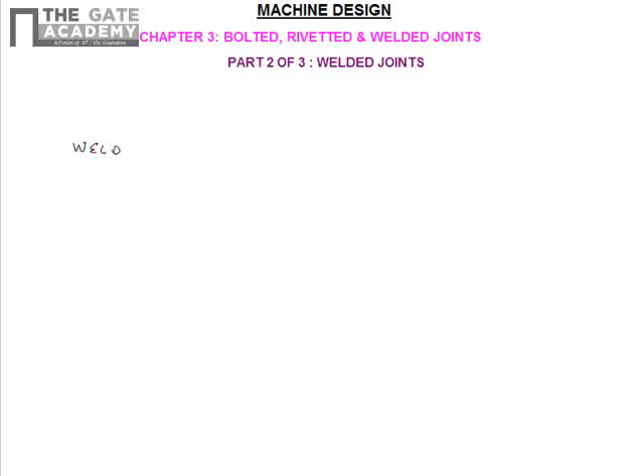Welded joints is an economical and efficient method of obtaining permanent joints. We've already seen that welded joints are permanent type of joints. Unlike bolted joints and riveted joints, this cannot be removed at any time during the assembly. It has to be caused damage to the assembly.

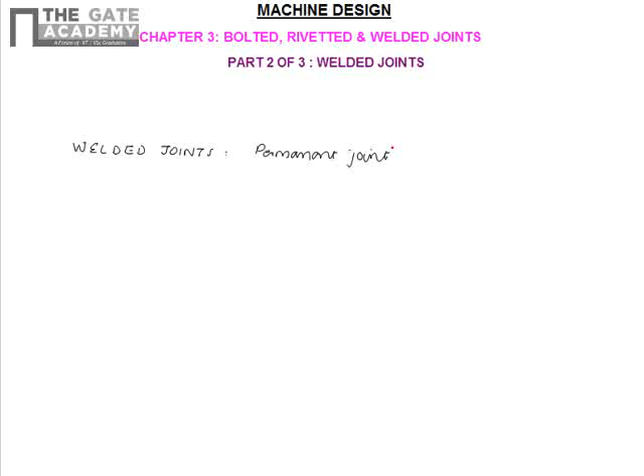Welding can be defined as a process of joining materials by heating to a suitable temperature with and without the application of pressure. Basically, there are three types of welding.

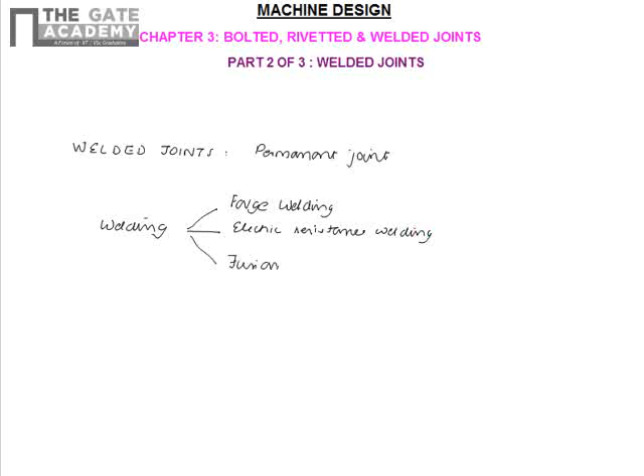Welding can be classified into three types. One is called forge welding. One is called electric resistance welding. The third one is called fusion welding. These are the main three types of welding.

In forge welding, the parts are heated to reach the plastic stage, and the joint is made by impact force.

In electric resistance welding, the parts are pressed together and the electric current is passed through them, so that because of the contact, the metal gets heated to the fusion temperature. That is about electric resistance welding.

In fusion welding, the edge of parts are heated by an oxyacetylene flame or an electric arc to reach the fusion temperature. Then they are joined using some filler materials. Again, fusion welding can be classified into gas welding, electric arc welding, and thermite welding.

The main two distinct applications of welded joints are they can be used as a substitute for riveted joints, and they can be used as an alternative for castings. Compared to riveted joints,

welded joints have got lot of advantages. They provide lot of advantages. Mainly, riveted joints require additional cover plates, gusset plates or straps, whereas in welding there is no extra additional part, and welding assembly always results in lightweight construction.

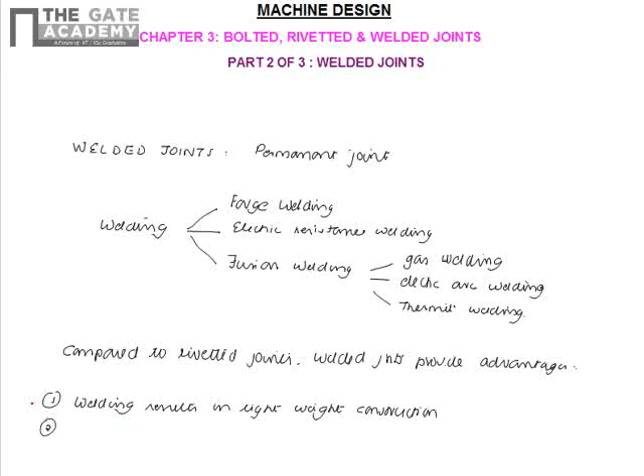Welding results in lightweight construction, in comparison with riveted joints. Then due to elimination of these components, the cost is also lower than riveted joints. Cost of welded joints is lesser than that in riveted joints.

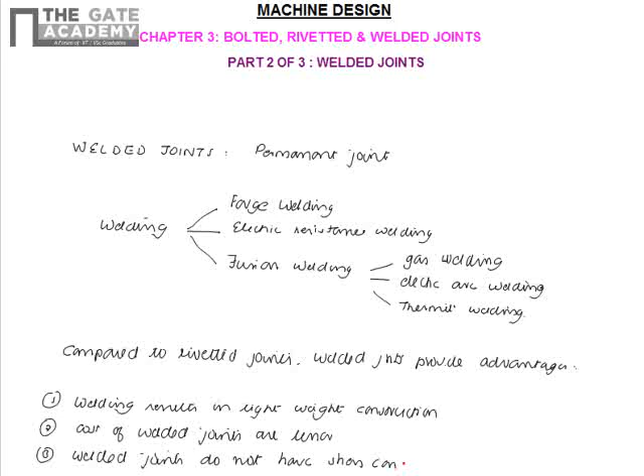Another thing is this: while using riveted joints, we have to make holes in the plates, which results in stress concentration as well as reduction in cross-sectional areas. This kind of problem does not come in welded joints. Welded joints do not have stress concentration, as in riveted joints.

Then, welded joints are usually tight and leak proof compared to riveted joints. Welded joints are tight and leak proof. These are some of the advantages of welded joints compared to riveted joints.

But they also have some limitations, like welding results in thermal distortions of the part. This is a major disadvantage of welding because it causes the fusion of materials, and it locally heats the material to a very high temperature, and when the material is cooled, residual stress gets inbuilt in the material, resulting in a lot of thermal distortions.

Therefore, welding will result in thermal distortions, thereby inducing residual stresses. This is a major disadvantage or drawback of welded joints.

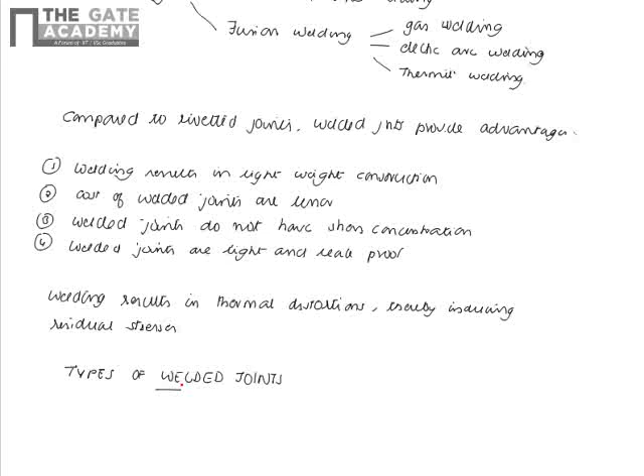Now, types of welded joints. Welded joints are basically classified according to the relative position of the two components. First, we have a butt joint, which is a joint between two components lying approximately in the same plane.

When thickness of plate is less than 6 mm, it is not necessary to bevel the edge of the plate, so square edge preparation is not required. It is something like this: when we have two plates which are parallel to each other, lying in the same plane, this kind of joint is called the butt joint.

This kind of preparation is called edge preparation. If the plate thickness is less than 6 mm, edge preparation is not required. If the plate thickness is greater than 6 mm, this kind of edge preparation may be required.

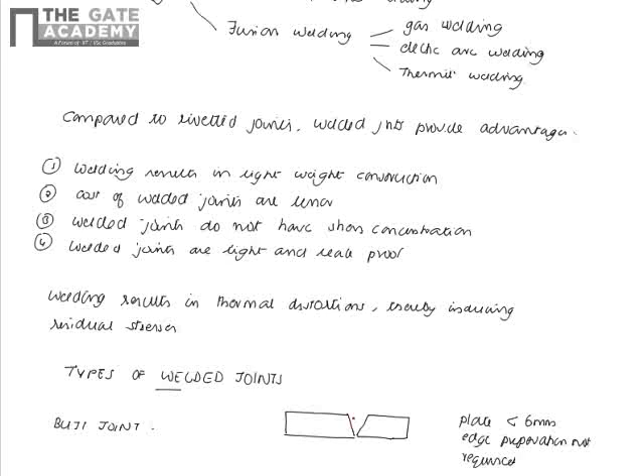And in this portion, we will fill the weld material, and this is called a butt joint. When there is no edge preparation done, such kind of joint is called a square butt joint.

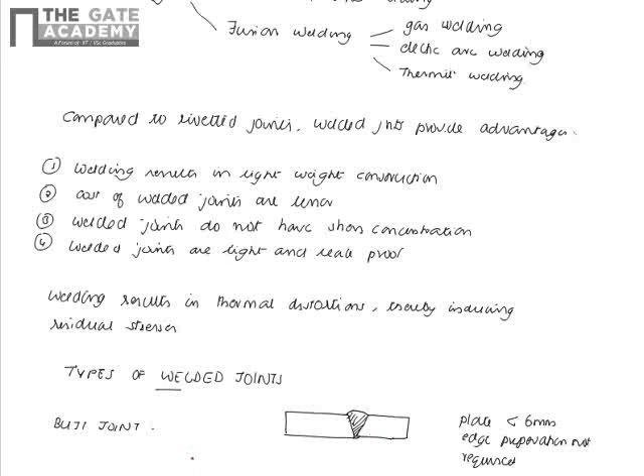So we can say that this kind of joint is called a square butt joint, which does not have any edge preparations. And when we have edge preparation, it's called a V butt joint. We have double welded V joints, and different types of butt joints are there.

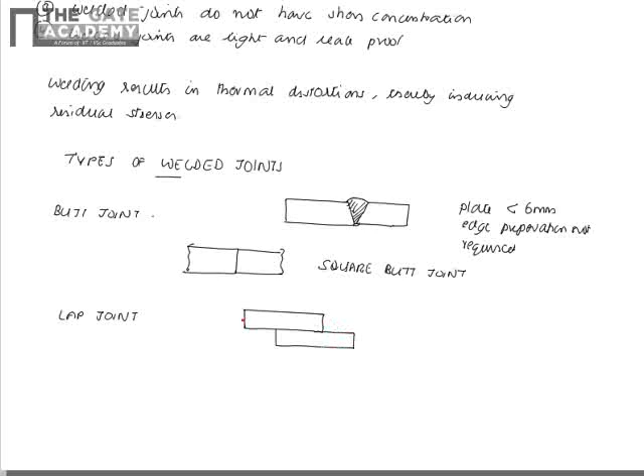Now, the next one is a lap joint. A lap joint is a joint between two overlapping components, and it consists of a fillet weld. So, a lap joint can be shown as this: two plates, and it is welded like this.

This is the lap joint, and this kind of joint is called a lap joint. This kind of welding is called a fillet weld. The fillet weld consists of an approximately triangular cross section joining two surfaces at right angles to each other. We can see here these two surfaces are at right angles to each other, and they are joined by a triangular kind of weld.

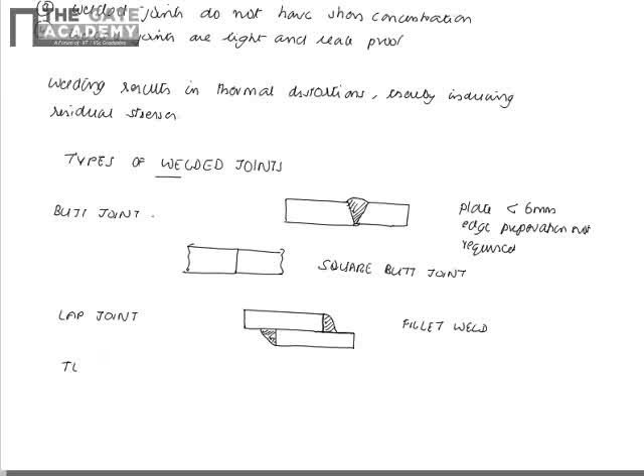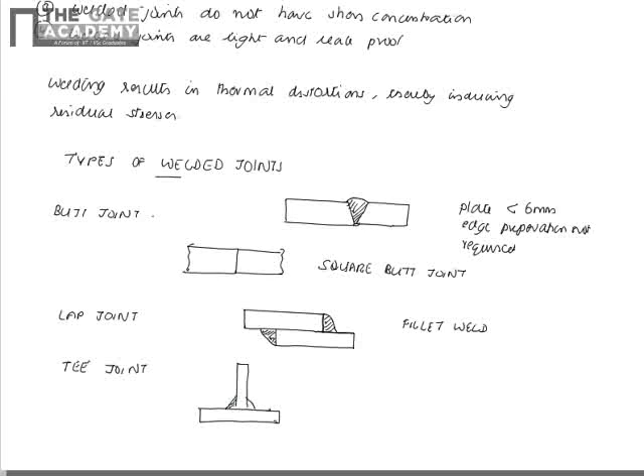Now we have something called a T-joint. It's nothing but a joint between two components located at right angles to each other. Here the two components which are welded are placed at right angles to each other in the form of a T. The end face of this component is welded to this component by means of a fillet weld.

This kind of weld is called butt welding, where two plates are in parallel position, and you have square butt joint, V butt joint, U butt joint. Different types of butt joints are also available. And when we come to lap joint, this kind of weld which has a triangular cross section is called a fillet weld. Even in T-joints also we come across a fillet weld. So these are the different types of welded joints available, and welds are classified based on the type of joint. Now we will try to see what are the stresses coming in the butt and fillet welds.

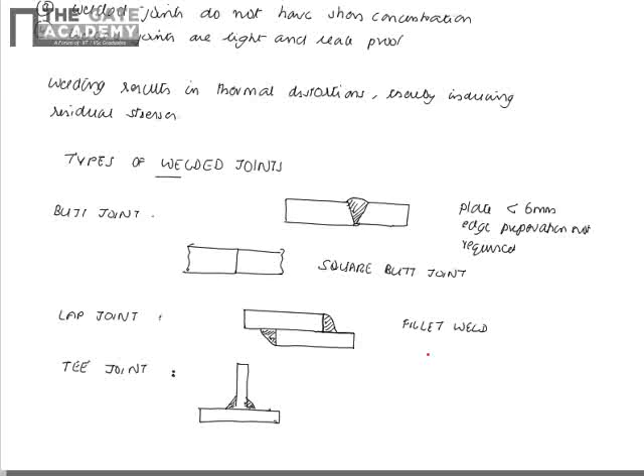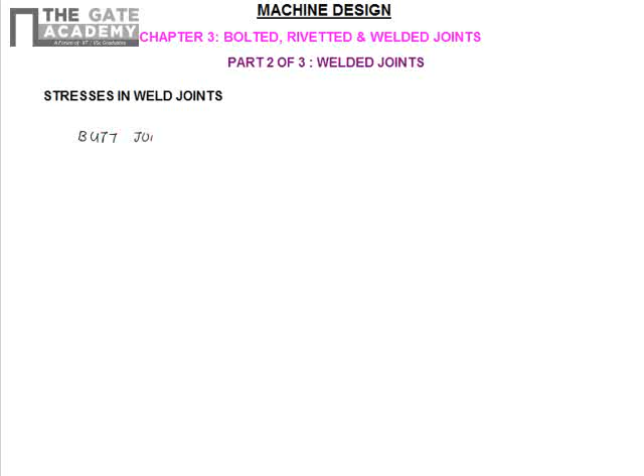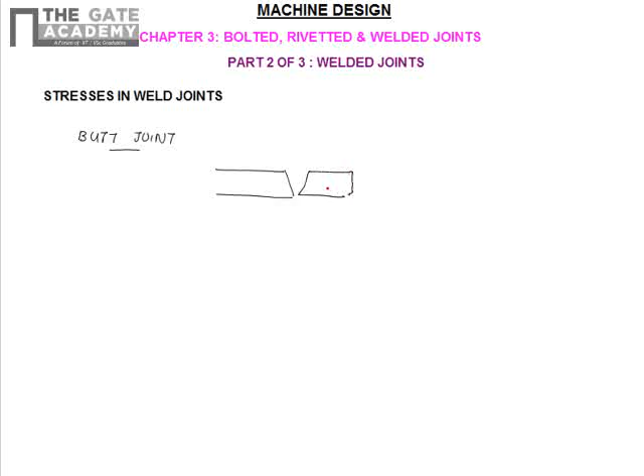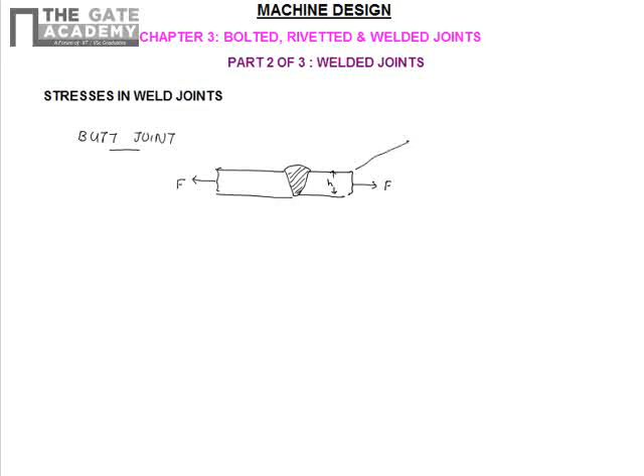Now we will see the different types of stresses in the weld joint. Basically we will start with a butt weld joint. So two plates are joined in this way. This is called a V butt joint. This is a weld, and we have a force F applied on both ends. Here the thickness of the plate is H, and the length of the plate...

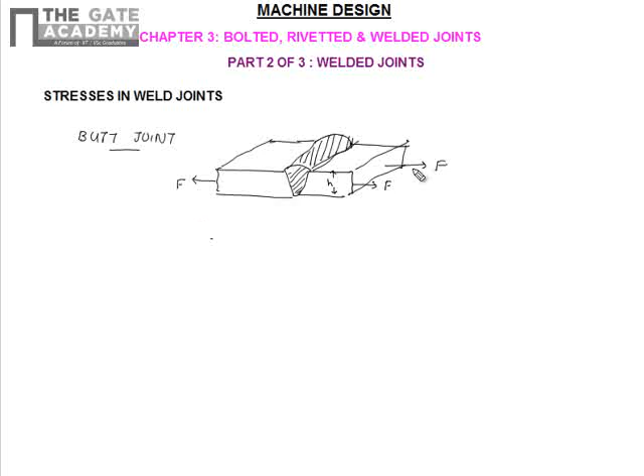So this kind of plate, two plates side by side, is joined by a butt joint, a V butt weld, and a force F is applied which tries to separate both plates. In this case, we have a normal stress in the weld joint, and the normal stress coming in the weld joint is given by F by area, where area is H into L, H being the thickness of the plate, L the length of the plate, and F the force applied. Sigma is the average tensile stress in the weld.

The throat of the weld does not include the reinforcement. The extra portion of material we see above this portion is called the reinforcement. H does not include the reinforcement. Whenever we go for fatigue loading or variable loading, this reinforcement has to be removed, because it causes a kind of discontinuity at this edge, which results in higher stress concentration under fatigue loading. So whenever we go for variable or fatigue loading, reinforcement is not preferred. This is the normal stress which comes in the butt joint.

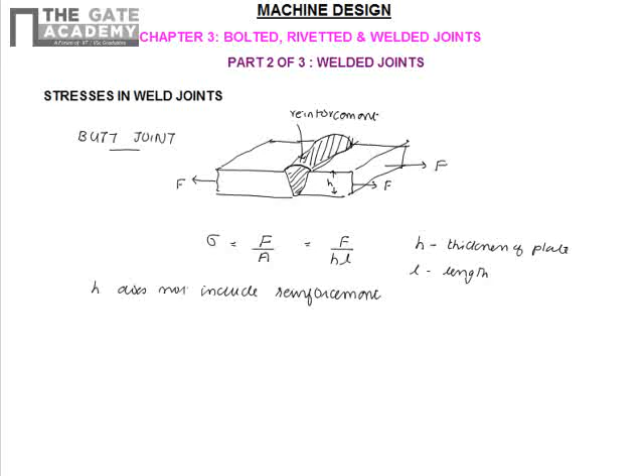Now we will see the second type of joint, namely the fillet weld joint. In a fillet weld, we have two plates kept on top of each other and welded in this way. We have already seen this kind of joint is called a lap joint, and this kind of welding is called a fillet weld. These two plates are tried to be separated by a force P.

Now in this case, if H is the thickness of the plate, the shear stress tau is given by P by the minimum area of the weld. The minimum area of the weld, if this is the triangular portion of the weld, the minimum length would be the perpendicular distance, and this will be, if this is H, this length will be H by root 2. This is called the throat of the weld. The throat is the portion which has the minimum area in the weld.

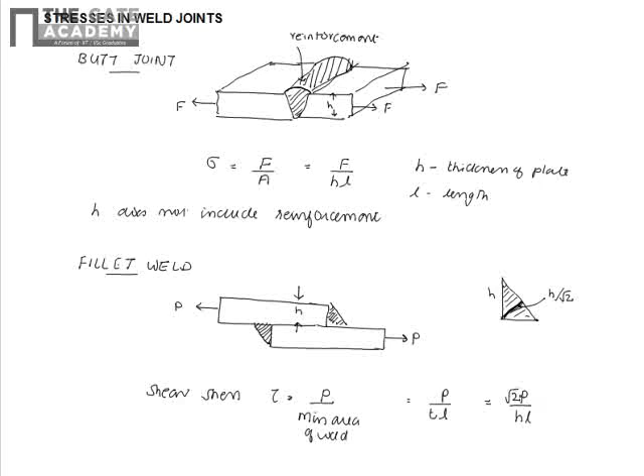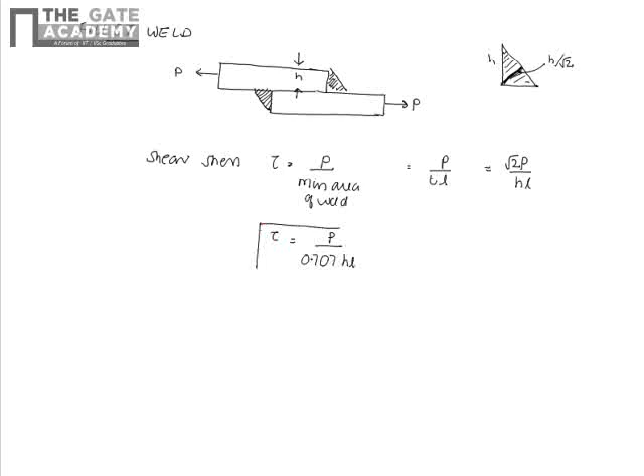So it will be P by T into L, which is equal to P by H by root 2 into L. It will be root 2 P by HL, or this will become P by 0.707 H into L. This will be the shear stress coming in the fillet weld joint.

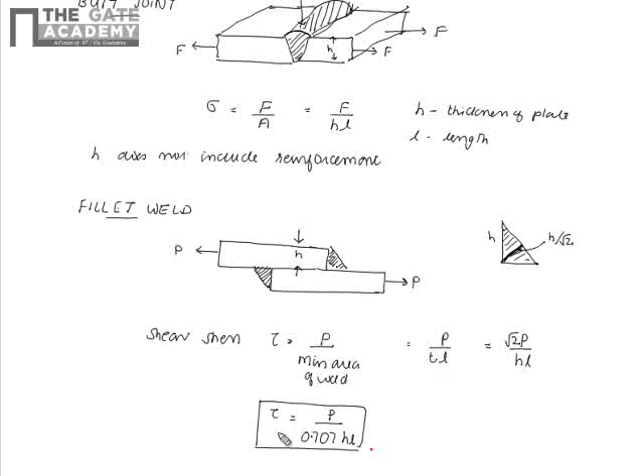In butt welding we have the normal stress given by F by H into L, where H is the width or thickness of the plate. Remember, H is the thickness of the plate and T is the throat of the weld. In fillet weld we have tau equal to P by 0.707 H into L, where H is the thickness of the plate, or it can also be written as P by T into L, where T is the throat of the weld.

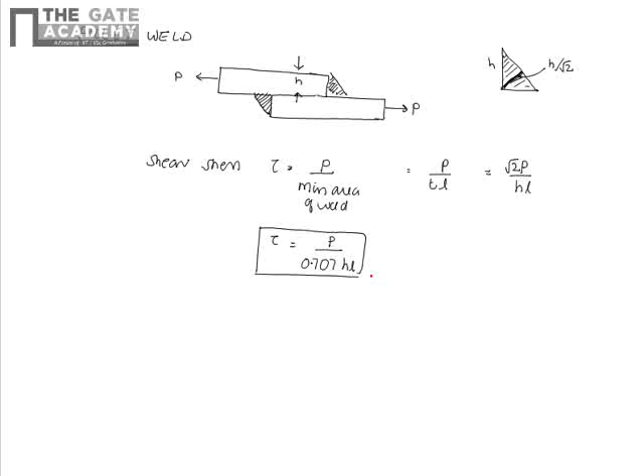Now we will see the case of a cantilever beam supported and fixed to the wall by two weld joints, with force F applied at the free end at length L. So now we will see the weld joints in torsion. This figure shows a cantilever of length L welded to a column by two fillet welds. The reaction at the support of the cantilever always consists of shear force and a moment. Now this is a force F applied at the free end. How do we find the amount of shear stress coming in the weld?

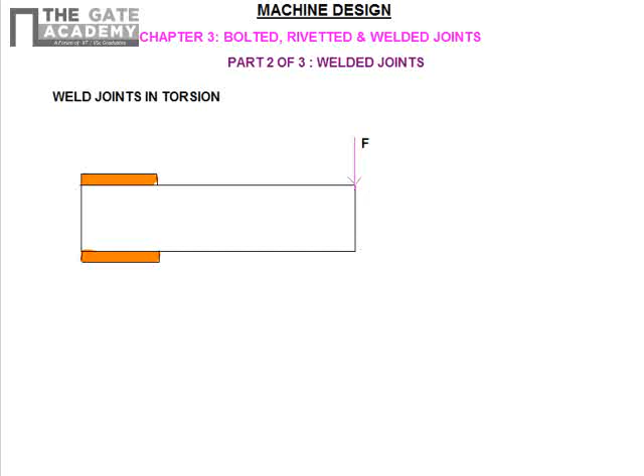To start with, as we have done in bolted joints, this force is transferred to the centroid of the weld joint. Since it's a symmetric weld joint, the two fillet welds at both ends will have a centroid at the center, and this force is transferred to the center. So it will have a force F, and it will have a moment given by F into E, where E is the distance of this force from the centroid. Similar to a bolted joint design, here also we will have a primary shear and a secondary shear.

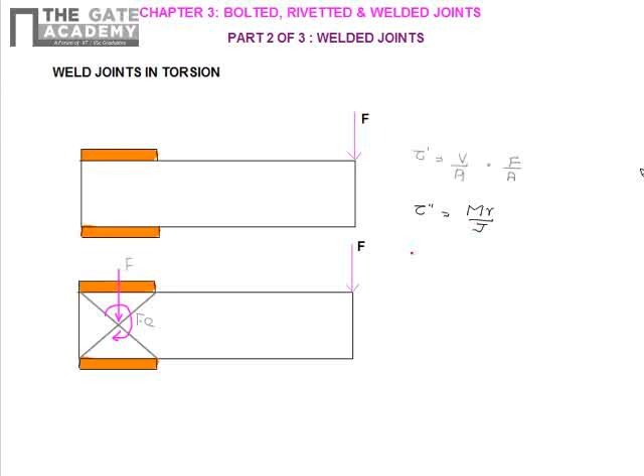The primary shear force or primary shear stress is given by tau dash equal to V by A, where V is nothing but the force F. The effect of the force on the weld joint will be seen in the primary shear stress, tau dash. Now the moment at the support causes secondary shear or torsion of the weld, and this stress is given by tau double dash equal to My by J, or Mr by J. So it is Tr by J, where R is the distance from centroid of weld to the point of interest.

Unlike bolted joints, where we had to find the stresses in the bolts, here since it's a weld joint, you can find the stress anywhere in the weld joint. We try to find these stresses at the points which are at a maximum distance from the centroid, since that will have the maximum stress. So this corner point will be the point of interest for us. At this point, if the distance is R, the secondary shear stress tau double dash is given by Mr by J, where M is equal to F into E, R is the distance from the center, and J is the polar moment of inertia of the weld joints.

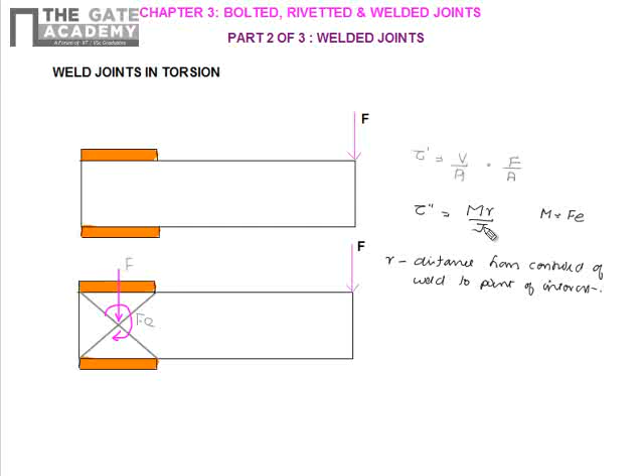Now suppose these weld joints can be represented like this. If this weld joint represents the throat widths, namely B1 and B2, the total area of the weld will be A equal to area of weld 1 plus area of weld 2, that is B1 D1 plus B2 D2. This is the area which has to be used in the formulation of primary shear stress, tau dash equal to V by A. Here the area to be used will be nothing but B1 D1 plus B2 D2.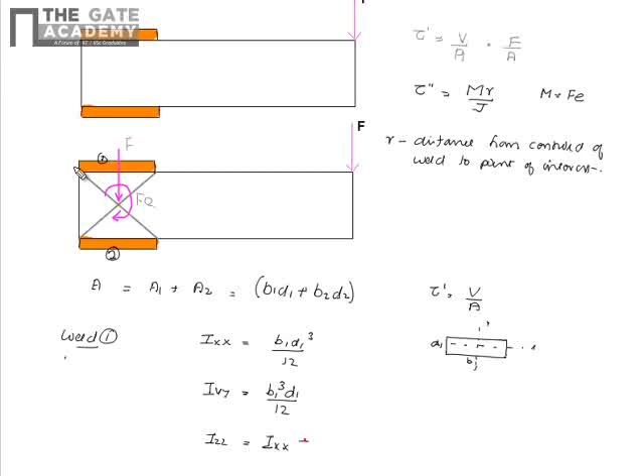Now we have found the centroid location. What is the moment of inertia of the weld about the center point? We will find, suppose this is weld 1 and this is weld number 2, we'll take weld 1. The moment of inertia about its own axis is given by B1 D1 cube by 12, where this is the weld, this is B1, this is D1. If you draw a centroidal axis for that weld, this is the x axis and this is the y axis. The moment of inertia about the centroidal axis for this weld is given by B1 D1 cube by 12. Similarly, Iyy will be given by B1 cube D1 by 12. Therefore, the polar moment of inertia, Izz, will be given as the sum of Ixx plus Iyy. This is nothing but B1 D1 cube plus D1 B1 cube by 12. Now this can be written as A into B1 square plus D1 square by 12. This is the moment of inertia of the first weld about its own centroidal axis.

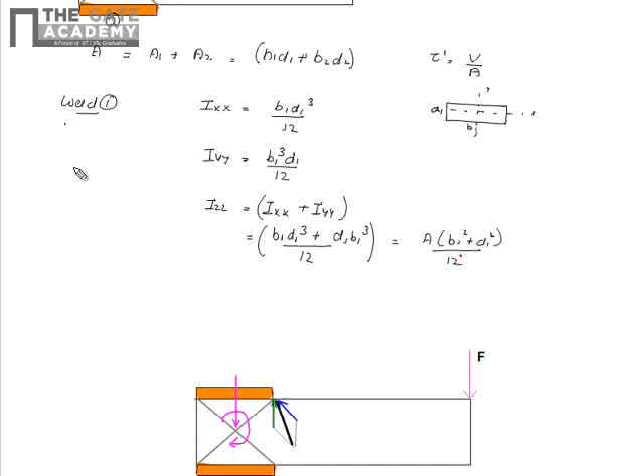Now what will be the moment of inertia of this weld about the centroid of the weld joints? In this figure we can see the force and moment acting at the centroid, causing a primary shear and a secondary shear at the weld joints, which has a resultant. Now we have found the polar moment of inertia of weld 1 about its centroid. So the polar moment of inertia about the centroidal axis IC will be equal to IZZ plus A into H square, where H is the distance between the centroids.

So the distance we can take, suppose this is the plate, this distance we take as R0 - the distance between the centroids, that is this point and this point. We have ICC equal to A into B1 square plus D1 square by 12, plus A into R0 square.

In this expression we know B1 and D1 - this is B1, this is D1. Since B1 is much greater than D1, B1 square will be much greater than D1 square, so D1 square can be neglected from this equation. We get A into B square plus R0 square, that is B square by 12 plus R0 square.

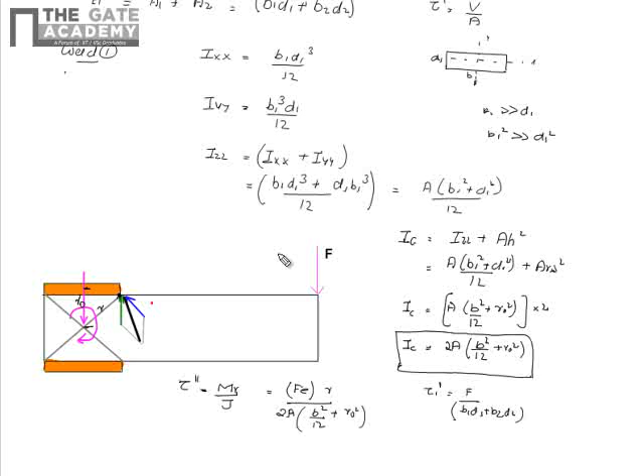Now we will see how to apply this principle in a problem. Here a welded connection shown in the figure is subjected to an eccentric force of 7.5 kilonewtons. Determine the size of the weld.

Size of the weld if the permissible shear stress of the weld is tau allowable equal to 100 Newton per mm square. This is the maximum shear stress which is allowed in the weld. So what will be the size of the weld?

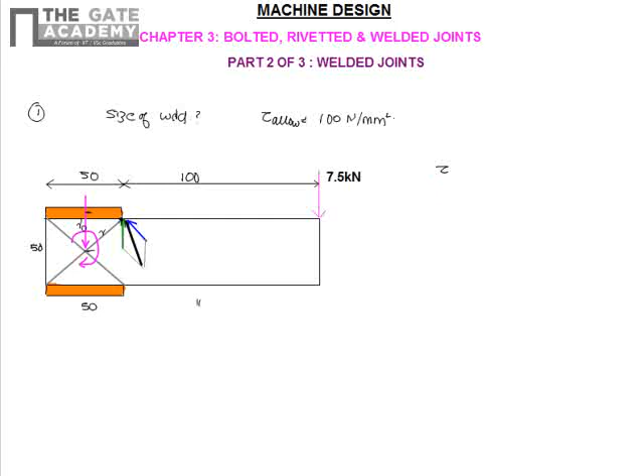Before starting we have to find the primary shear stress, given by V by A. For that we need the area of the weld. Area of the weld will be given by 50 into T into 2, that's equal to 100T, where T is the throat of the weld.

The centroid location, because of symmetry, will be at the center point only. Therefore E, which is the distance of the force from the centroid, will be 100 plus 25, equal to 125.

Therefore the moment will be equal to F into E. This is equal to 7.5 kilonewtons, that is 7500 into 125. 7500 into 125 will be equal to 937,000 Newton millimeter. This is M.

And what is V here? V is nothing but 7500 newtons. So what is the primary shear stress? Primary shear stress tau dash is given by V by A, that's equal to 7500 divided by A. A is nothing but 100T. So this will be 75 by T.

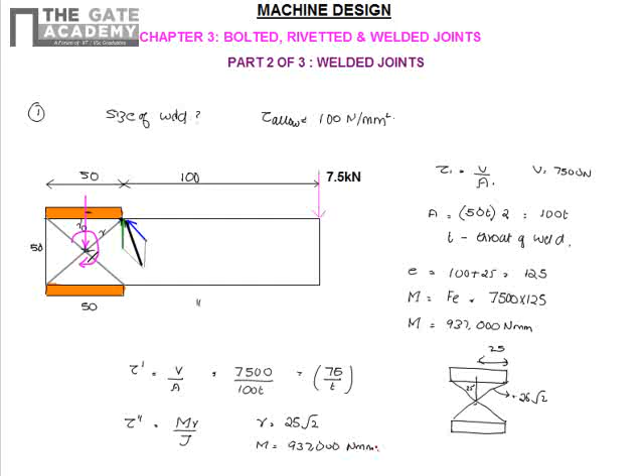Now the only thing we have to do is find what is J. J we have already seen - J is equal to A into B square by 12 plus R square.

That is, if we have two welds, weld 1 and weld 2, the moment of inertia Ixx will be given as, if thickness is T and width is B, Bt cube by 12 plus Tb cube by 12 will be Izz of weld 1 about its own centroid, which we can assume to be Tb cube by 12.

Therefore I about the centroid will be equal to Tb cube by 12 plus A into H square, that's equal to A into B square by 12 plus R square. The H is nothing but the distance between the centroids, which will be equal to 25 mm.

So the ICC, the polar moment of inertia of both welds about the centroid location, will be 2A into B square by 12 plus R square. That's equal to 2 into A, where A of the weld is 100T. B is the width of the weld, that is this length, equal to 50 mm. So 50 square by 12 plus R, the distance of this centroid from the center, is 25, plus 25 square.

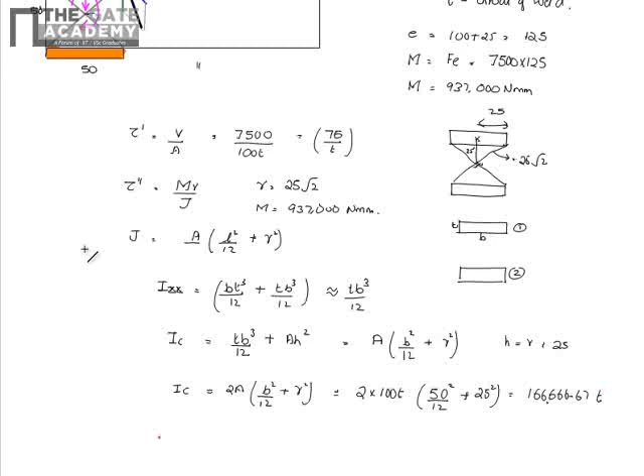So the secondary shear stress tau double dash is equal to Mr by J, that's equal to 937,000 into 25 root 2 divided by J, which will be equal to...

In this area of the weld, the 100T is the area of both welds, therefore the multiplication of 2 is not required because it's already taken care of. So this will be 166,667 by 2, it will be 83,333.35.

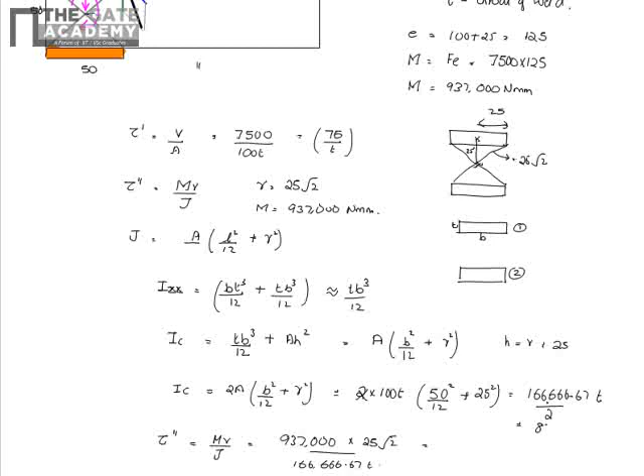This by 2, so this will be 937,000 into 25 into square root 2, divided by 166,666.67 by 2. This will be equal to 397.8 by T, Newton per mm square.

So this is the secondary shear stress, and the primary shear stress is nothing but V by A. This is 75 by T, which we have already found out.

Now what will be the resultant shear stress? Here is my weld 1. At this point, the primary shear stress is given by 75 by T, and the secondary shear stress is given by 397.8 by T. So in this case, what will be the resultant shear stress?

We know that the angle between the welds is equal to 45 degrees. Therefore, the resultant can be found as the root of tau 1 dash square plus tau double dash square plus 2 tau double dash cos 45. This is nothing but 1 by T, the square root of 75 square plus 397.8 square, plus 2 into 75 into 397.8 into cos 45. This will come out to be 454 by T.

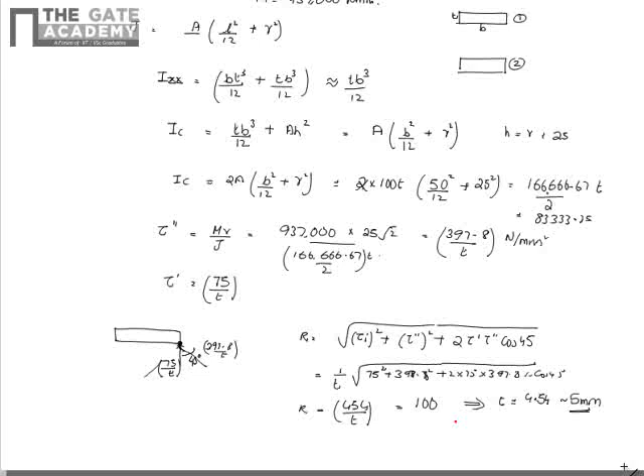So in the earlier portions we have seen the weld joint subject to torsion. Now we will see what happens to a weld joint subjected to bending moment, and what kind of stresses come in those kind of weld joints.

The case is shown here: a cantilever beam of rectangular cross section is welded to a support by means of fillet welds 1 and 2. What kind of stresses come in this weld, and how do we do the design of this weld? We know that this force F acting at this point can be shifted to the centroid of the weld joints by an additional moment also coming in. So when the force is shifted from this point to the centroid, it gets shifted along with a moment given by the force into the distance between the two axes, which is Fe.

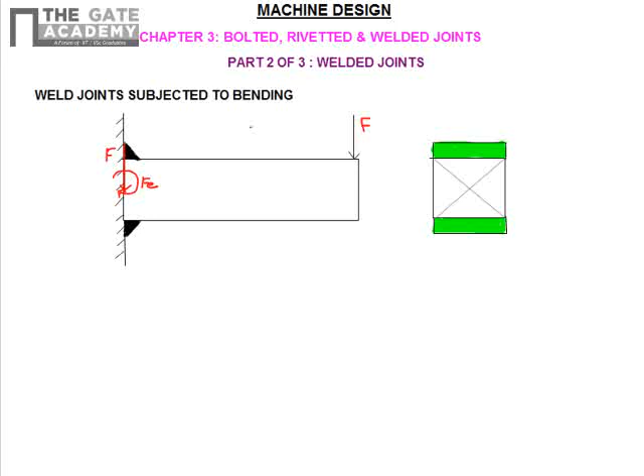Now from this diagram, the effect of this force F will be to produce shear in the weld joints, and the effect of this moment or couple Fe will be to produce a normal stress on the weld joints. So here we are going to get a combination of shear stress and normal stress. We'll see the values of the stresses we get in this kind of case.

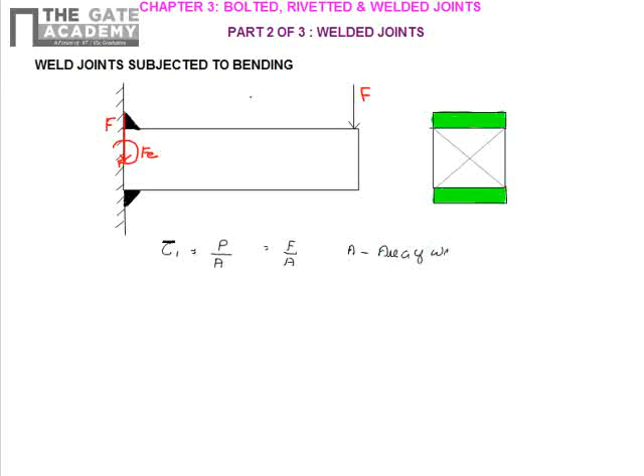So here we can say the shear stress tau 1 will be given by F by A, where A is the area of the weld. In this case it will be B1 D1 plus B2 D2, the complete area of the weld, where B1 is this length and D1 is this length. This will be the shear stress in the weld joint.

And what about the normal stress? Normal stress will be the bending moment into Y by I.

Now what is I? I is the moment of inertia of all the welds about the neutral axis, and Y is a distance from the neutral axis. So here in this case, the neutral axis will be the axis passing through this point.

So that is nothing but Ixx. So Ixx of the weld about its own centroid is given by BT cube by 12. The moment of inertia, Ixx, BT cube by 12, that will be the moment of inertia about the centroid of this weld.

Now we want to transfer this moment of inertia about this axis. Therefore, moment of inertia about the centroid will be equal to Ixx plus A into h square, by parallel axis theorem. This is equal to BT cube by 12 plus area of the weld, BT, into the distance. We will assume the total length to be D, so it will be D by 2 whole square.

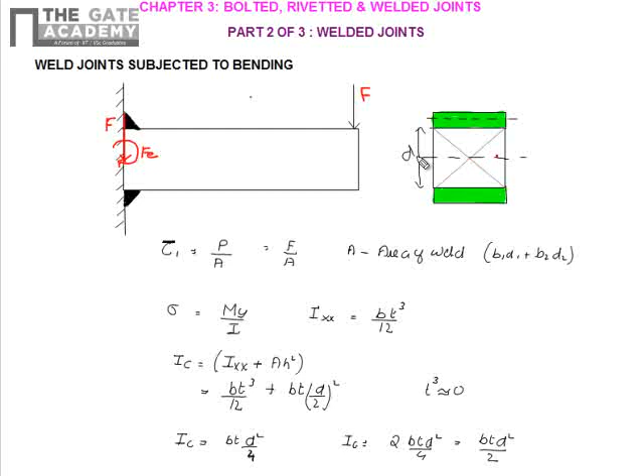Now we have the values. We have sigma equal to My by I. What is y? Y is nothing but d by 2, and I is bt d square by 2.

Now we know what is sigma and what is tau. Therefore, the maximum shear stress will be equal to square root of sigma by 2 whole square plus tau square. This is the maximum shear stress. When we have a combination of normal stress and shear stress, it will be given by square root of sigma by 2 whole square plus tau square.

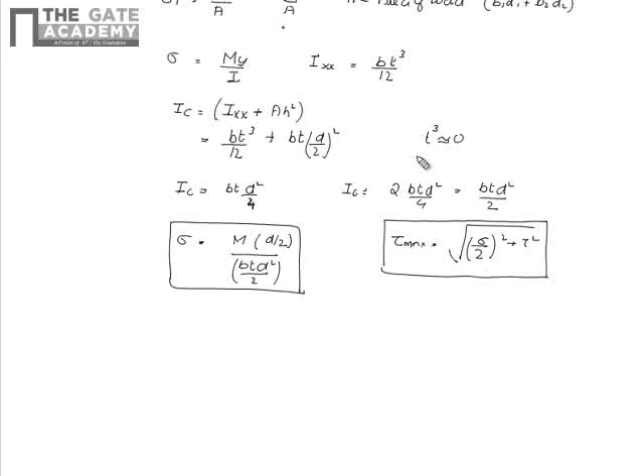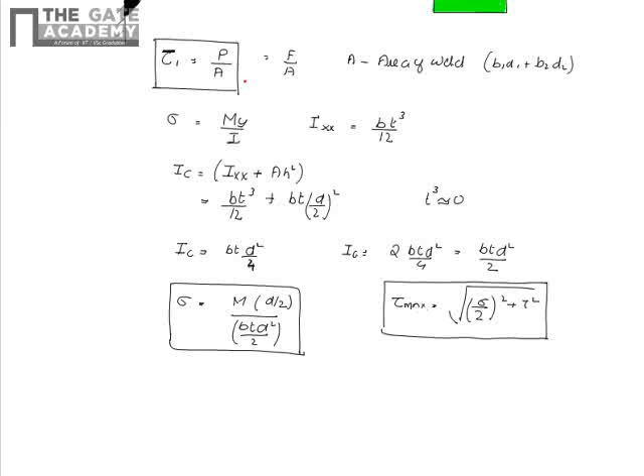Now sigma is given by this relation, and tau will be given by this relation, P by A. So we know tau, we know sigma, so we can find the maximum shear stress in this kind of weld joint. Thus we can design weld joints when subject to bending also.

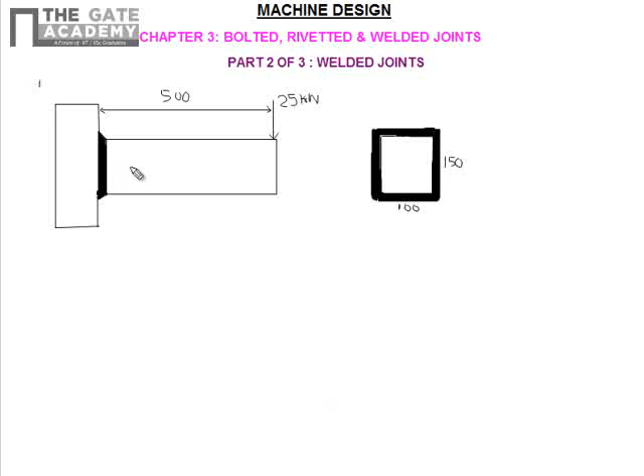Now we will take another problem. We have a shaft of rectangular cross section which is welded to a support by means of fillet weld as shown here. Determine the size of the weld if the permissible shear stress, tau allowable, is limited to 75 Newton per mm square.

Now how do we start with this? We have to find the total area of the weld. Total area of the weld will be given by 150t plus 100t into 2. This is equal to 500t mm square, where t is the throat of the weld.

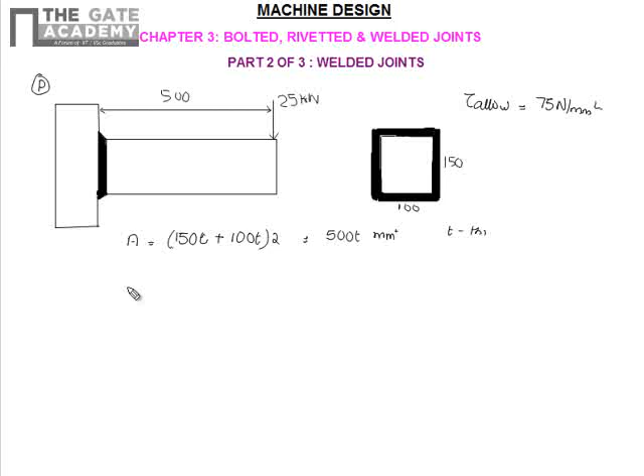Now the primary shear stress tau 1 is equal to P by A, that's equal to 25 kilonewtons divided by 500T. This will be equal to 50 by T Newton per mm square.

Now the secondary stress - we know the bending stress is given by My by I. M is equal to 25 into length, which is 500 mm, so this much Newton mm. And y is equal to the height by 2, 150 by 2.

And what is I? I is the moment of inertia of the complete weld about the centroidal axis, which is this axis. Now if we consider this as weld joint 1, this is 2, this is 3, and this is 4.

Now for weld 1 as well as weld 3, the moment of inertia about its own axis is given by BT cube by 12, and the moment of inertia about the centroidal axis is given by BT cube by 12 plus BT into d square. This is almost equal to BT d square.

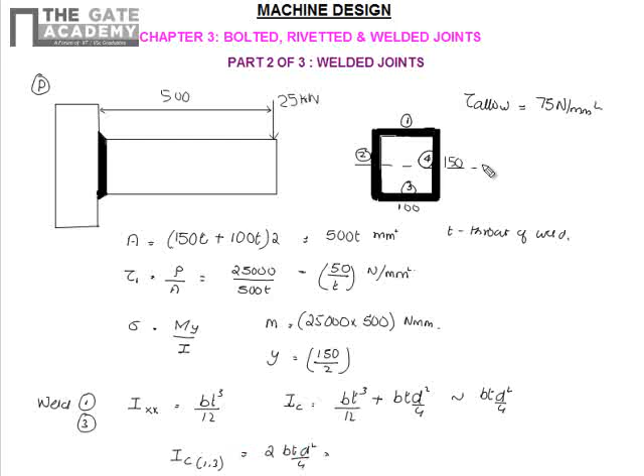About weld 2 and weld 4, the moment of inertia about the x-axis is given by T b cube by 12. Therefore, I about centroid will also be equal to the same T b cube by 12. Since two weld joints are there, the moment of inertia about the centroidal axis for weld 2 and 4 together will be T b cube by 6.

Therefore, the total moment of inertia will be equal to BT d square by 2, that is for weld 1 and 3, plus T b cube by 6, that is for weld 2 and 4. Taking T outside, we get BD square by 2 plus B cube by 6. This will be the total moment of inertia of both the weld joints about the centroidal axis.

Here B is equal to, so I will write as B1 and B2 because both are different. So B is equal to B1 is equal to 100 and B2 is equal to 150. So we get 100 T into D square. D square is equal to 75 square by 2, plus T into B2 square is 150 square by 6.

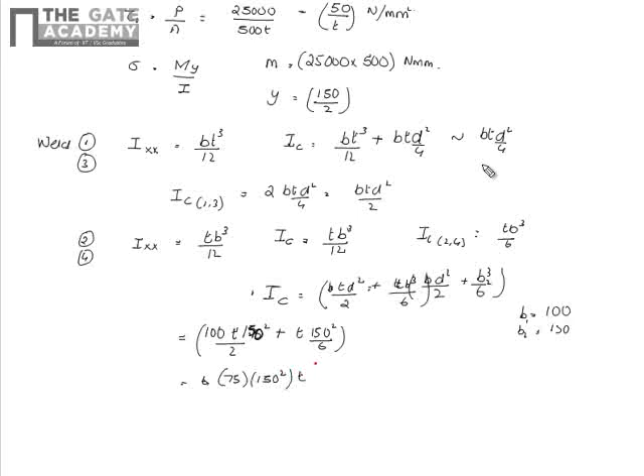Therefore, we can get the bending stress as M Y by I, where M we have already found out to be 25,000 into 500, Y is 75, divided by 75 into 150 square T. This will come out to be 555.5 by T Newton per meter square. This is the normal stress.

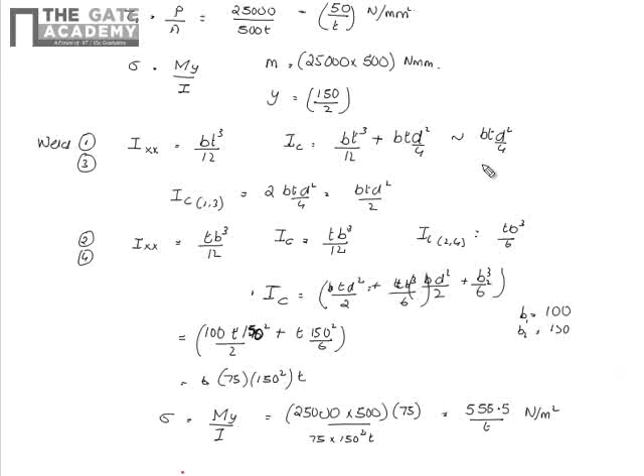And the shear stress we have already found out, it's 50 by T. Therefore, the maximum shear stress is equal to square root of (sigma by 2 whole square plus tau square). This is equal to square root of (555.5 by 2T plus 50 by T square). So 555.55 by 2 square plus 50 square, square root, will be equal to 282.24 by T Newton per mm square.

The allowable shear stress of the material is given as 75 Newton per mm square. So therefore 282.64 by T should be equal to 75, which gives T as 282.64 by 75, equal to 3.76. So the throat of the weld should be 3.76 mm, and the height of the weld should be root 2 T, which is equal to 5.32, or roughly we can take it as 6 mm.

So the height or thickness of the weld should be 6 mm and the throat of the weld should be 3.76 mm. This way we can solve problems and design the weld for bending load also. So we have seen design of weld joints for shear loads, for torsion loads, as well as bending loads.

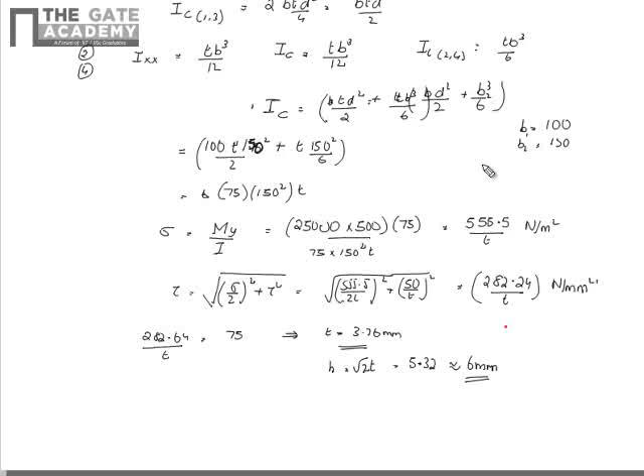Now we'll see one problem. A permissible stress in a fillet weld is 100 Newton per mm square. The fillet weld has equal length of 15 mm each. The allowable shearing load on weldment per centimeter length of weld is asked. This is almost straightforward. The shear stress is given by P by 0.707 H into L, therefore the load or force per unit length will be equal to 0.707 H into tau.

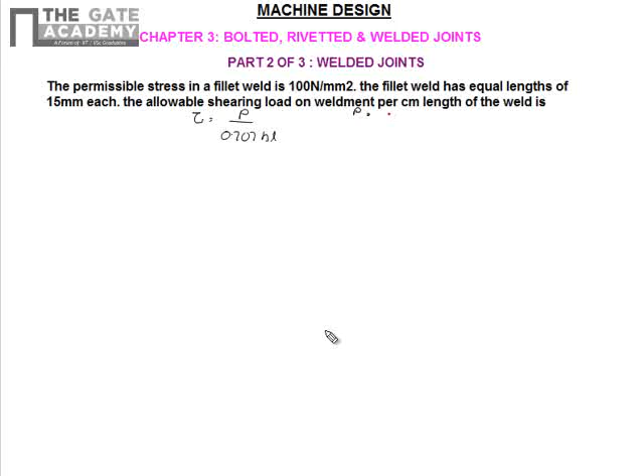This is equal to 0.707 into H is 15 into tau is 100. So this will be equal to 0.707 into 1500, which comes to 10.6 kilonewtons. Because they have asked the length in centimeters, it comes to 10.6 kilonewtons as the load per unit length in centimeters.

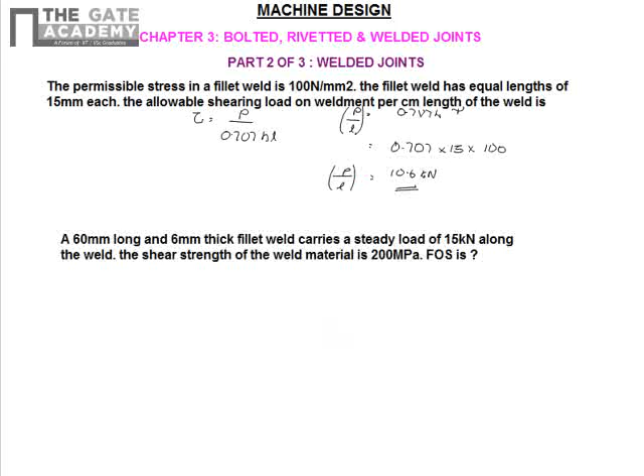In another question, we have a 60 millimeter long and 6 mm thick fillet weld carrying a steady load of 15 kilonewtons along the weld. The shear strength of the material is 200 MPa. What is the factor of safety? We know that the shear strength is given by P by 0.707 H into L.

So that is equal to 15,000 divided by 0.707 into H. H is 6 mm, and L is 60 mm long. So this will be 15,000 divided by 0.707 into 60 into 6, equal to 58.93 MPa. So factor of safety is equal to the allowable shear strength of the material divided by tau, which is 200 by 58.93, that comes to 3.4.